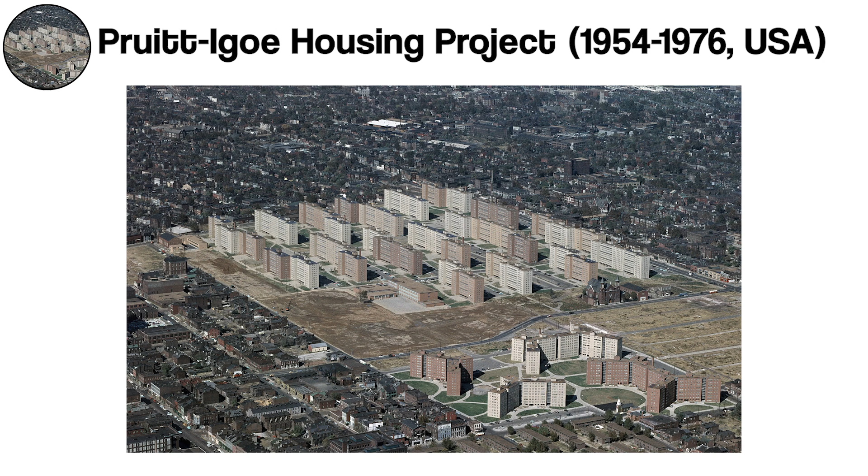Imagine a housing project so grand it was hailed as the future of urban living. Pruitt-Igoe, a modernist utopia in 1950s St. Louis, promised to transform lives with its sleek design and affordable homes. Yet, just two decades later, it became a crumbling symbol of failure, brought down in a series of dramatic demolitions.

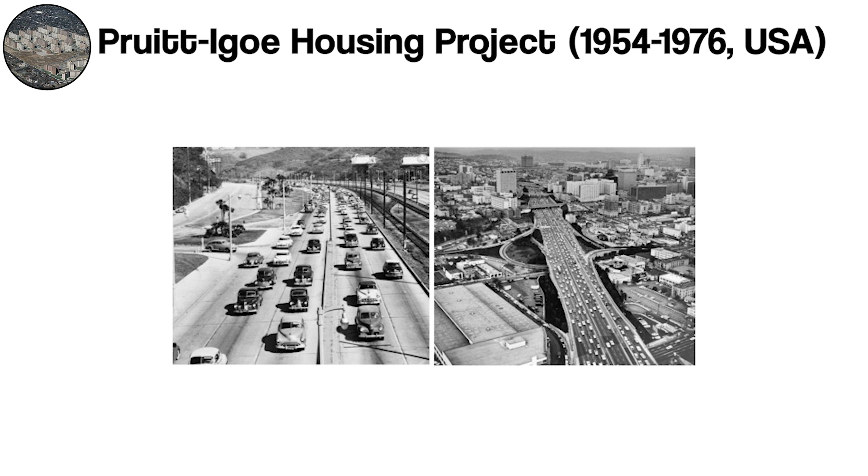So what went wrong? It wasn't just the buildings, it was the system. Segregation policies and economic decline trapped residents in poverty, while the city's middle class fled to the suburbs, taking vital tax revenue with them. Pruitt for black residents, Igoe for whites.

But as desegregation took hold and white flight drained St. Louis of its middle class, the project's funding collapsed, maintenance budgets shrank, elevators broke down, trash collection stopped. Residents were trapped in poorly lit, crime-ridden towers. Without jobs or support, desperation grew.

By the late 1960s, Pruitt-Igoe was plagued by crime, poverty, and neglect. The ambitious design, which isolated residents in massive, impersonal blocks, only made things worse. It became a textbook example of how top-down urban planning can fail. In just two decades, the grand experiment ended in implosion, literally.

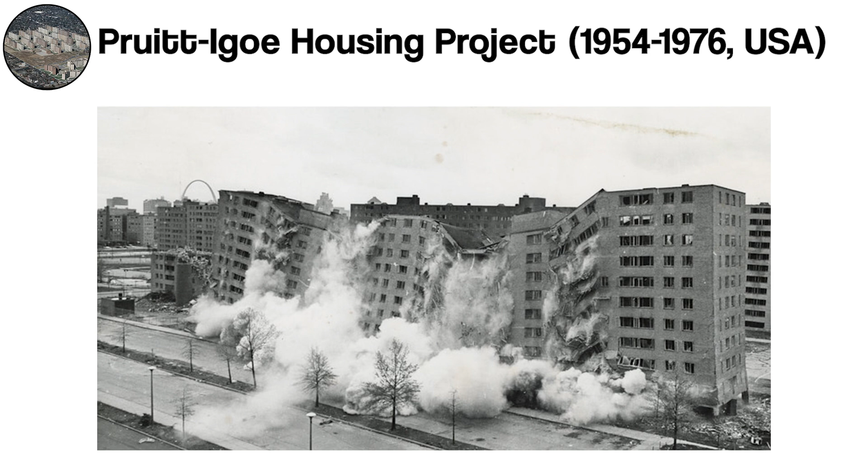But the failure of Pruitt-Igoe wasn't just about bricks and mortar. It exposed the flaws of a system that ignored economic realities, racial inequality, and the importance of community. The ruins of Pruitt-Igoe prompt us to reflect: how can we design cities that uplift communities rather than divide them?

In 1960, Brazil unveiled Brasília, a futuristic capital built from scratch in the country's heart. Designed by architect Oscar Niemeyer and urban planner Lucio Costa, it symbolized progress, equality, and a new national identity. The city's striking airplane-shaped design featured broad avenues, modernist buildings, and neatly segregated zones for work, living, and leisure.

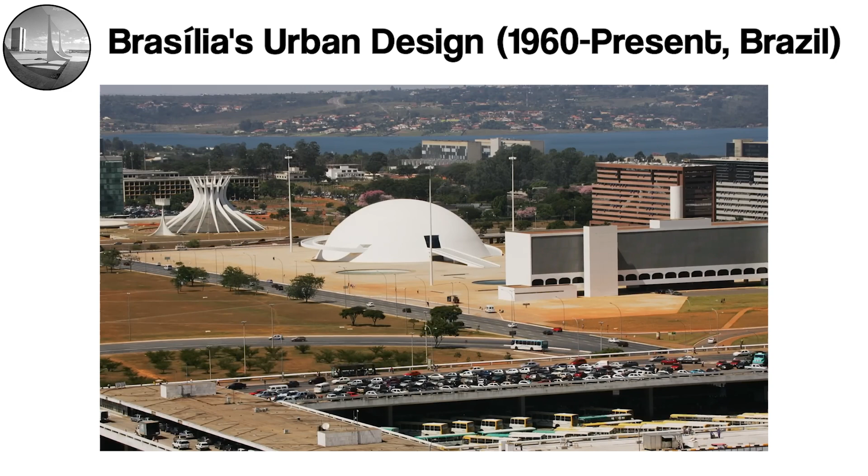Although Brasília was celebrated as a masterpiece of modern urbanism, its promise of equality faltered. Built for cars, not people, the city prioritized form over function. Its wide open spaces and rigid zoning left residents isolated, with limited public transit and walkability.

Perhaps most striking is the social divide it created. Wealthier residents live in the planned core, while lower-income workers are pushed to satellite cities far from the center. This divide contradicts the utopian ideals Brasília was meant to embody.

Today, Brasília is a UNESCO World Heritage Site celebrated for its bold vision. But it's also a cautionary tale, a city designed for efficiency but criticized for neglecting the human experience. Can a city designed for the future truly thrive without addressing the needs of all its people?

Welcome to Kowloon Walled City, once the densest place on Earth, a city within a city where over 30,000 people lived crammed into just 6 acres. But this wasn't your typical urban area. It was a labyrinth of narrow passageways, illegal structures, and an ungoverned existence unlike anything the world had seen.

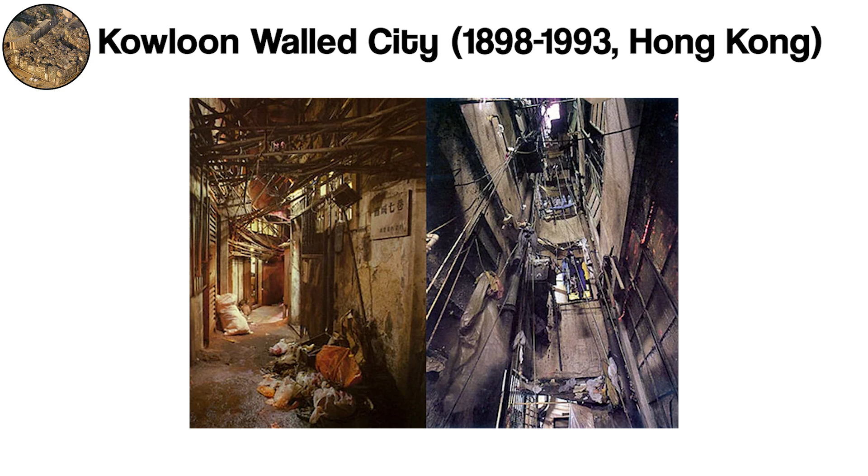The walled city began as a Chinese military fort, but after Britain leased Hong Kong in 1898, it became a legal gray zone that was claimed by China but largely ignored by British authorities. By the mid-20th century, it had morphed into a self-regulated world, home to refugees, unlicensed dentists, noodle factories, and countless families.

With no official oversight, residents built upward, layer by layer, creating a chaotic patchwork of homes and businesses. Electricity was tapped illegally. Plumbing barely worked. Sunlight rarely reached the ground. Yet, despite the chaos, a strong sense of community thrived. Neighbors supported each other, and life carried on.

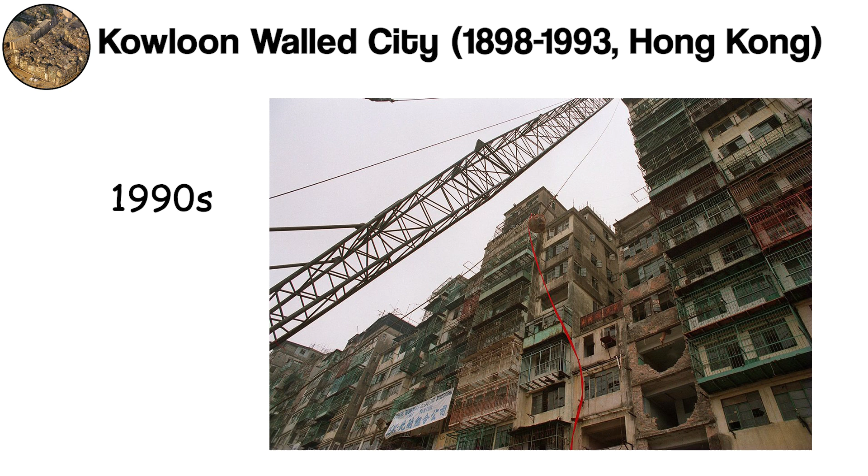By the 1990s, the Hong Kong government demolished the walled city to make way for a park. Today it's remembered as both a marvel of human resilience and a stark example of the limits of unregulated urbanization.

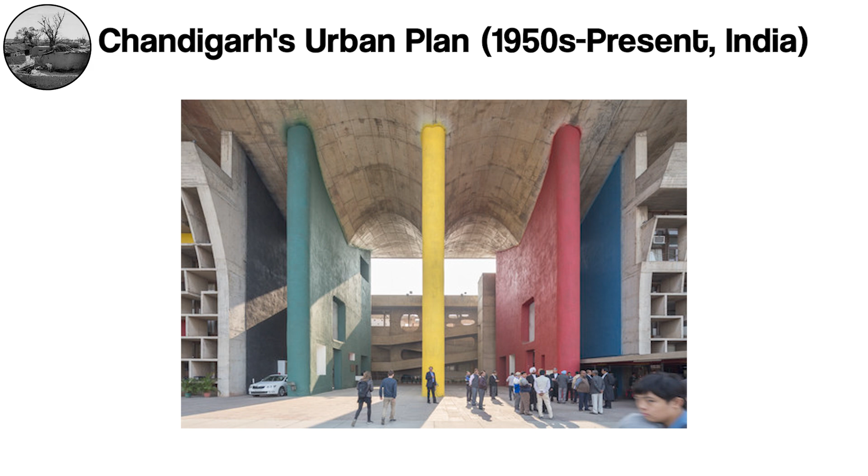Chandigarh, the first planned city of independent India, was born out of necessity after the partition of 1947 left Punjab without a capital. In the 1950s, Prime Minister Jawaharlal Nehru envisioned a city that symbolized progress, modernity, and a break from colonial pasts. Swiss-French architect Le Corbusier was chosen to design this ambitious project, assisted by a team of architects and planners.

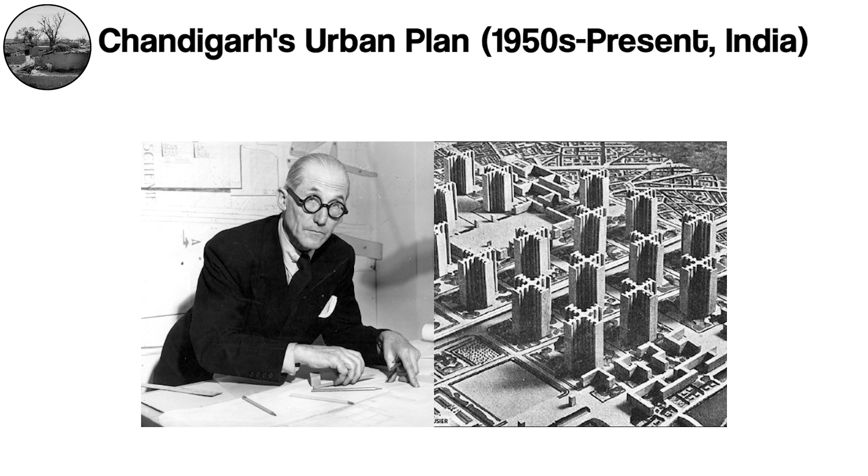Le Corbusier's vision for Chandigarh was rooted in modernist principles. The city was divided into sectors, each functioning as a self-contained neighborhood with housing, schools, shops, and green spaces. Unlike chaotic traditional sites, Chandigarh prioritized order and functionality, with wide roads, a grid layout, and extensive landscaping.

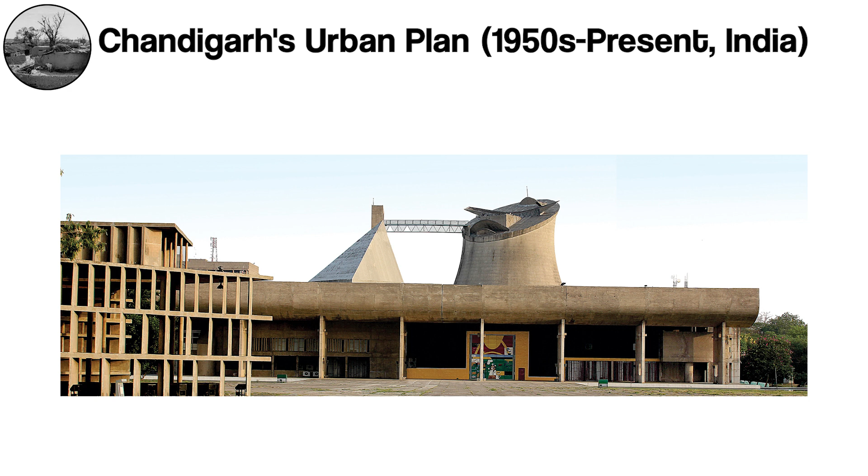Chandigarh's capital complex, featuring the Secretariat, High Court, and Legislative Assembly, is a UNESCO World Heritage Site. The Open Hand Monument, a symbol of peace and reconciliation, reflects the city's ethos.

Despite its meticulous design, Chandigarh has faced challenges. Its rigid sector system, designed for smaller populations, struggles with urban sprawl and increasing traffic. Critics argue that the city prioritizes cars over pedestrians, limiting accessibility.

Today, Chandigarh stands as a landmark of urban planning and modern architecture. While it inspires cities worldwide, its evolution highlights the need for adaptability in design to meet the changing demands of urban life.

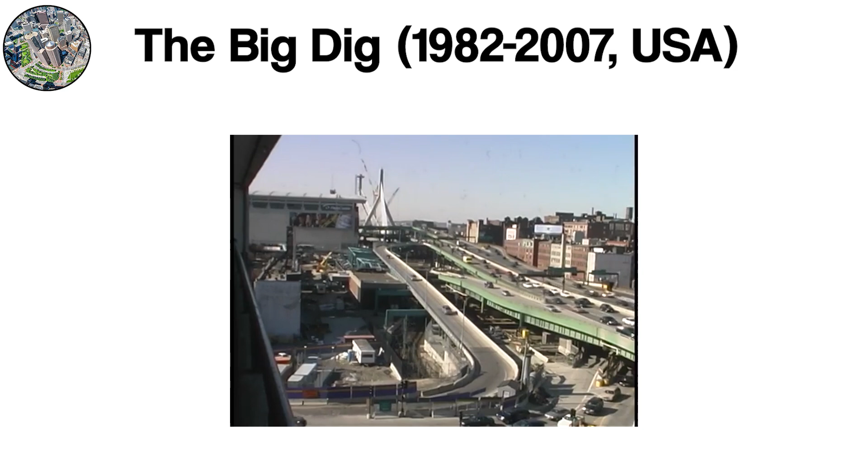In the 1980s, Boston faced a crisis. The elevated central artery, a 6-lane highway slicing through the city, was choking under the weight of traffic. Commutes stretched endlessly, pollution filled the air, and the city's historic charm felt overshadowed by its failing infrastructure.

Enter a project so ambitious it promised to redefine urban planning, the Big Dig. But what began in 1982 as a $2.8 billion dream quickly spiraled into one of the most controversial infrastructure undertakings in history.

Engineers proposed burying the highway beneath Boston's bustling streets, constructing the massive Thomas P. O'Neill Jr. Tunnel, and extending Interstate 90 through the Ted Williams Tunnel to connect downtown to Logan International Airport. The project would also include the striking Leonard P. Zakim Bunker Hill Memorial Bridge, a beacon of modern design.

Yet, as deadlines slipped and costs ballooned to an astounding $15 billion, cracks, both literal and figurative, began to appear. Leaks plagued the tunnels, political battles erupted. Then, in 2006, disaster struck.

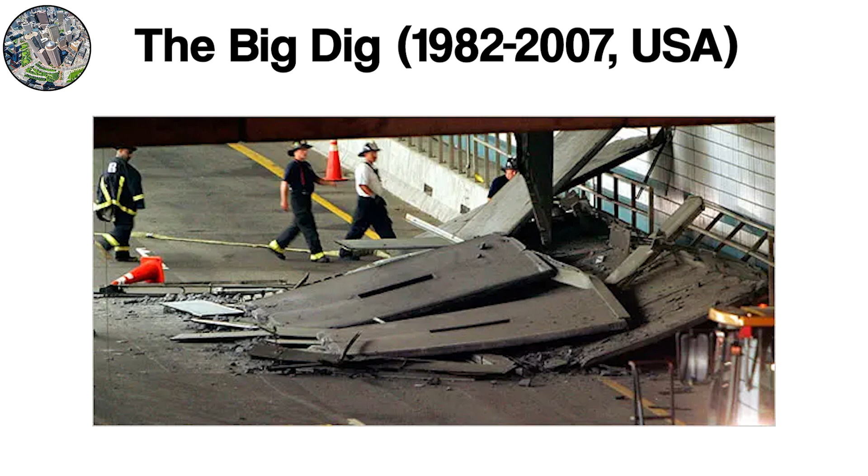A ceiling panel collapsed in the Ted Williams Tunnel, tragically claiming the life of a motorist and casting doubt over the entire project. And yet, despite the turmoil, the Big Dig transformed Boston.

It tore down barriers, reconnected neighborhoods, and created over 300 acres of parks. Travel times dropped dramatically, and the city's skyline was reborn.

So, was it worth it? The Big Dig stands as a testament to bold ambition and a stark warning of the high cost of dreaming big.

Tucked away in the bustling heart of Mumbai, Dharavi is a place like no other. It's a sprawling slum, yet it's a microcosm of ingenuity, survival, and community spirit. With over 1 million people packed into just 2.1 square kilometers, an area roughly the size of 393 football fields,

imagine each field holding over 2,500 people. It's one of the most densely populated places on Earth. Yet, Dharavi is a thriving city within a city.

Once a swampy marshland, Dharavi grew into a powerhouse of small-scale industries. From recycling Mumbai's waste to producing garments, pottery, and leather goods, it's an economic engine generating an estimated $1 billion annually.

Its narrow alleys buzz with activity, each corner filled with factories, shops, and homes, all coexisting in a delicate balance.

However, Dharavi's success story isn't without its struggles. Crumbling infrastructure, poor sanitation, and overcrowded living conditions paint a stark contrast to its industrious side. The people here face daily hardships, yet their resilience is undeniable.

The community bonds are strong, and mutual support is the foundation of life here. Redevelopment plans have sparked controversy, with fears of displacement and gentrification. Still, Dharavi remains a symbol of the human spirit, thriving against all odds.

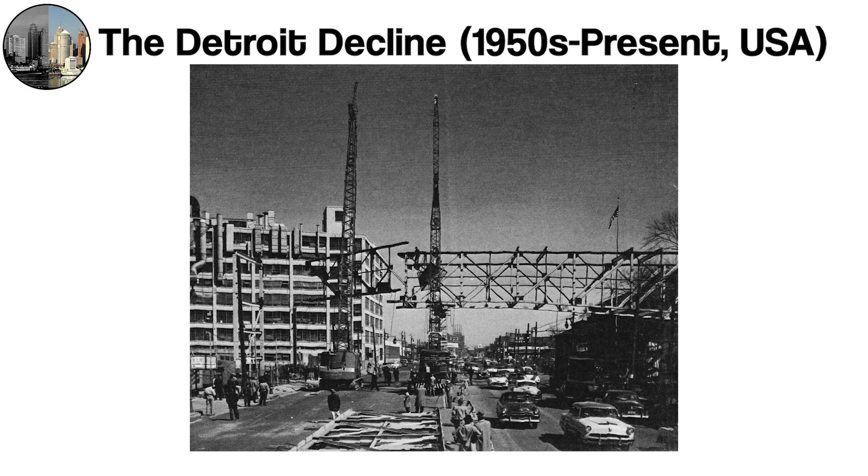What led to the decline of Detroit, the city that once drove America's automotive dreams? Once the glittering hub of industrial power and innovation, it now stands as a haunting reminder of what happens when prosperity fades. In the mid-1900s, Detroit was a symbol of strength, home to the world's most powerful automakers and a thriving middle class.

But just a few decades later, the Motor City was struggling. The decline began slowly in the 1950s, as the automotive industry shifted and factories closed, workers lost their jobs, and with them, their homes and livelihoods.

Suburbanization lured people away, and racial tensions boiled over into violence. The riots of 1967 were a turning point, leaving the city scarred and divided. By the 1980s, Detroit's once vibrant streets were now filled with abandoned buildings, high crime rates, and a population that had dwindled by half.

The very industries that built it were now in crisis, unable to compete with global competitors. Detroit's fall culminated in 2013 when the city filed for bankruptcy, the largest in US history.

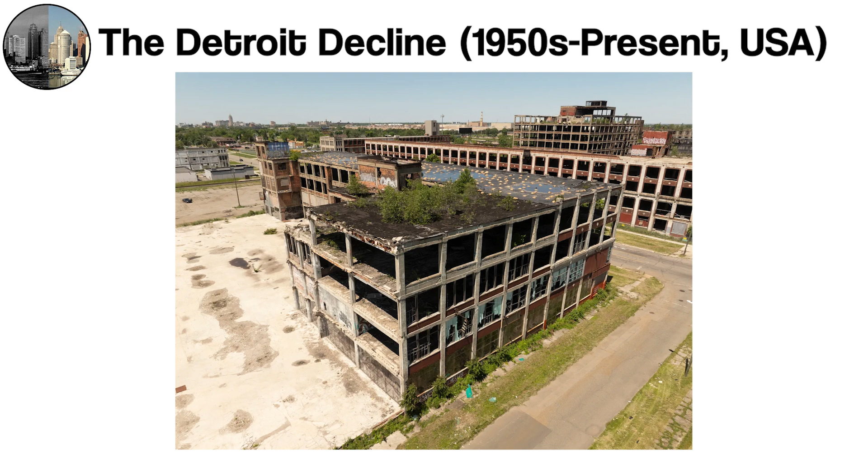Yet, despite its deep wounds, Detroit's story is not over. The city is fighting to rise again, looking toward a future of innovation, culture, and a relentless will to survive. The Motor City may have stalled, but it's not out of gas yet.